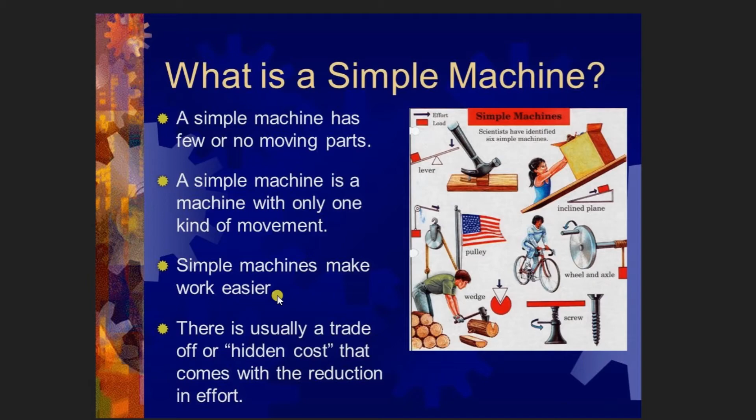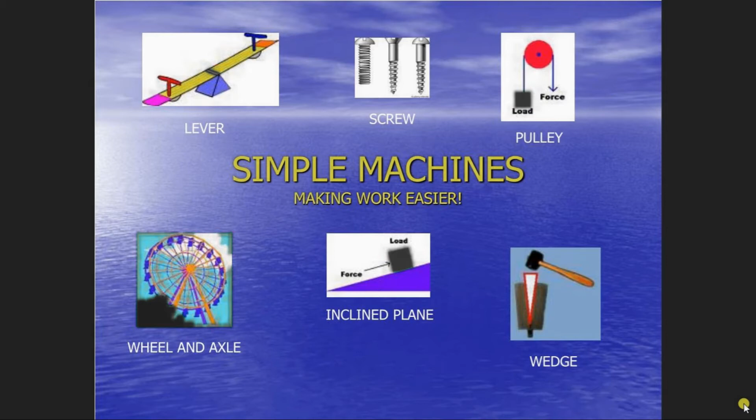Here you can see that there are 6 kinds of simple machines. What are those? Lever, screw, pulley, wedge, inclined plane and wheel and axle. So one by one we are going to study about each machine.

A lever is a bar or a board that rests on a support or is fixed at one point. A lever can transfer and increase the force applied at one end of it, and it is used to move heavy objects and open things like the lid of a box.

So here you can see that 3 things are there: effort, load and fulcrum. So the fixed point at which this rod moves is called the fulcrum, whereas the object which has to be lifted is called the load, and whatever force you are applying on the rod is called the effort. So 3 things are present in a lever, that is the fulcrum, load and effort.

Now talking about the types of lever, based on the positions of fulcrum, load and effort, levers have been classified into 3. What are those? Class 1 lever, class 2 lever and class 3 lever. So one by one we are going to study about each type of lever.

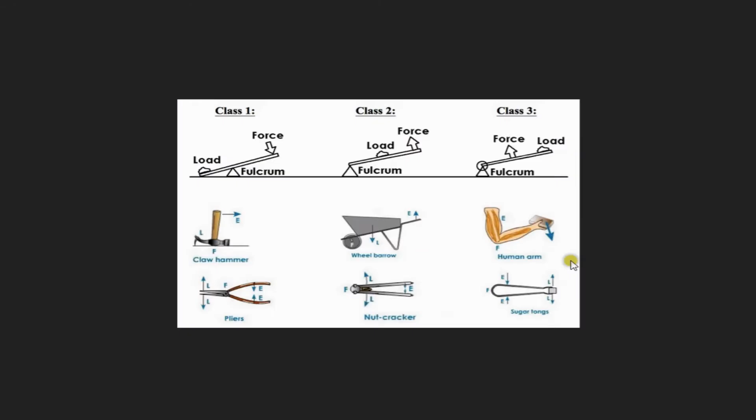Now depending on the middle position, you can see here in a class 1 lever, the fulcrum is in the middle. In a class 2 lever, the load is in the middle, and in a class 3 lever, the force, or you can say effort, is in the middle. So for load, fulcrum and effort, the position will keep on changing accordingly.

So in the first, the fulcrum is in the middle, second, the load is in the middle, and third, effort or force will be in the middle, or you can say this force is also denoted as effort. Okay, that means how much force you are applying or how much effort you are applying to do the job.

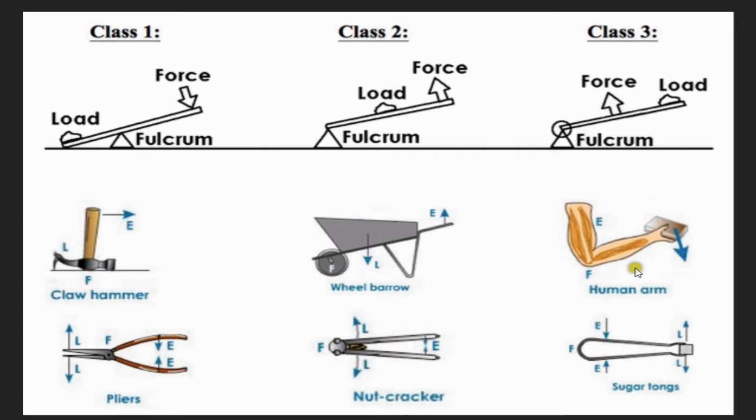For class 1 lever, the examples are the hammer and the pliers. For class 2 lever, examples are the wheelbarrow and nutcracker. For class 3 lever, the human arm and sugar tongs.

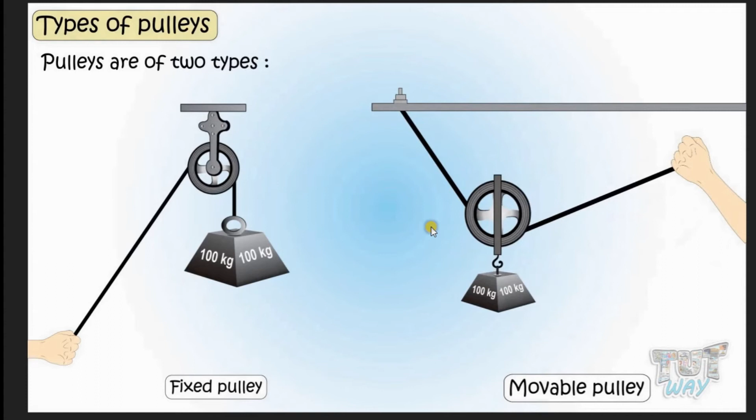Movable pulley. In a movable pulley, the wheel also moves along with the load. Okay, this is not fixed at one place, unlike the fixed pulley. So this is called the movable pulley, and the wheel also moves along with the load. This pulley is used to lift heavy loads, and they are used as a crane or to lift the heavy engines of vehicles.

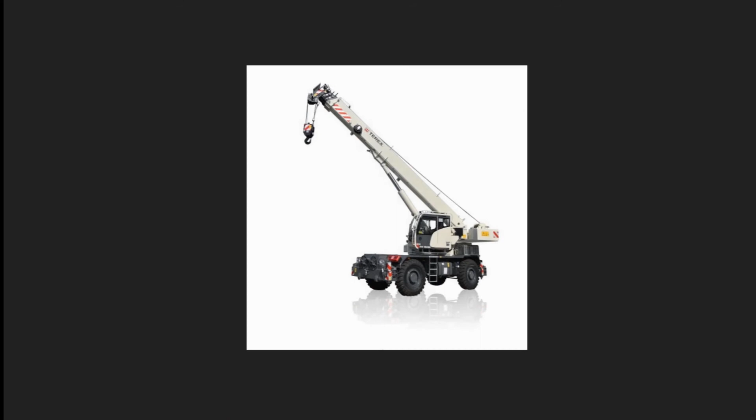A fixed pulley is used to draw water from the well. This is one of the examples. Whereas a movable pulley is being used, you can see here, to lift heavy objects such as heavy engines of vehicles.

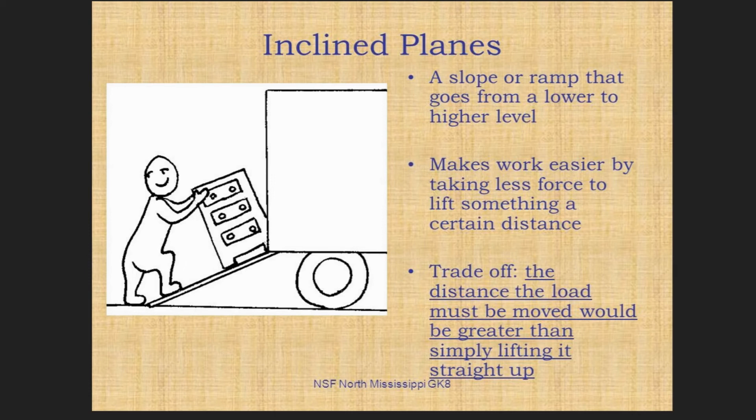Now children, the next simple machine is known as the inclined plane. It is not a complicated one. An inclined plane is just a sloping surface, or you can say a ramp, that goes from a lower to a higher level. That means its one end is higher than the other and it helps to move heavy loads with less effort. That means you need not put in more effort. Okay. There are some examples of inclined planes.

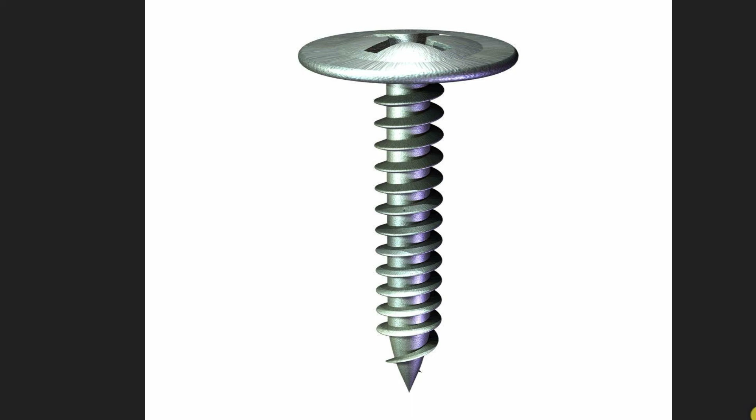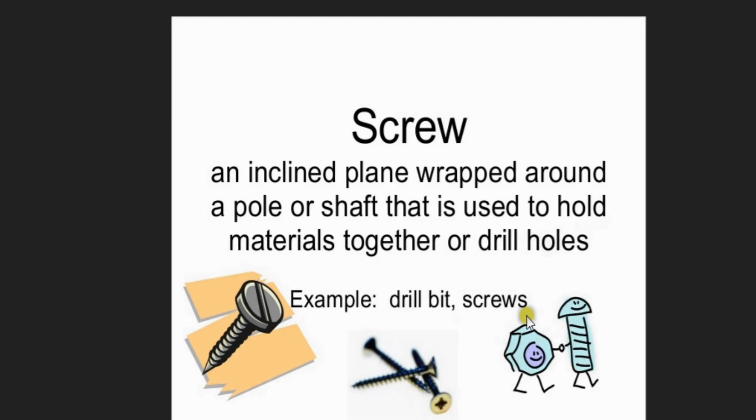Now the next machine is the screw. Actually, a screw is a curved slope or an inclined plane which is wrapped around a pole or a cone or shaft that is used to hold materials together or drill holes. Okay, so these are the examples given here. A drill bit is there, then screws are there, and a bottle cap also works on the screw, and a dentist chair is also there, and then screw jacks.

The next simple machine is the wedge. A wedge is a simple machine used to push two objects apart. That means it is used for splitting or cutting the object. A wedge is made up of two inclined planes. Okay, these planes meet and form a sharp edge. This edge can split things apart.

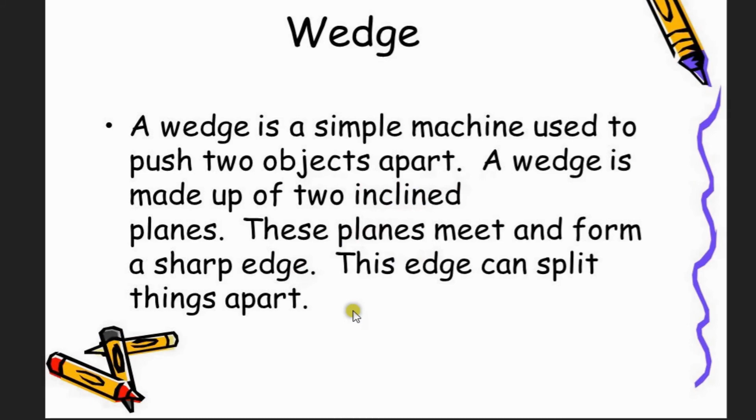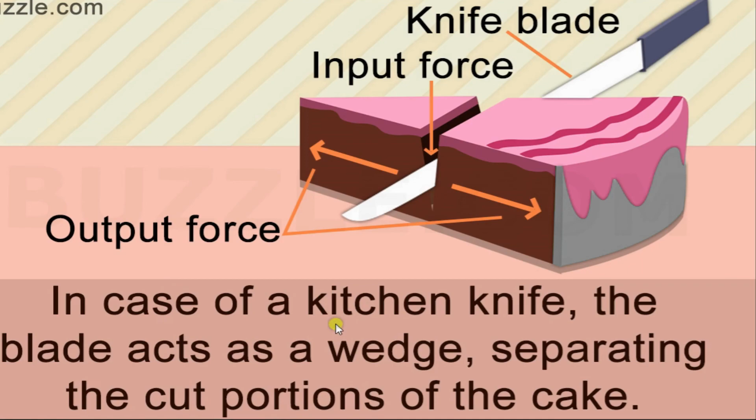Now the sixth machine is the wheel and axle. Here you can see that it is two connected objects that rotate about a common axis. So here this is the axis on which the wheel will move, and on the same axis a rod will move. So this combination is called the wheel and axle.

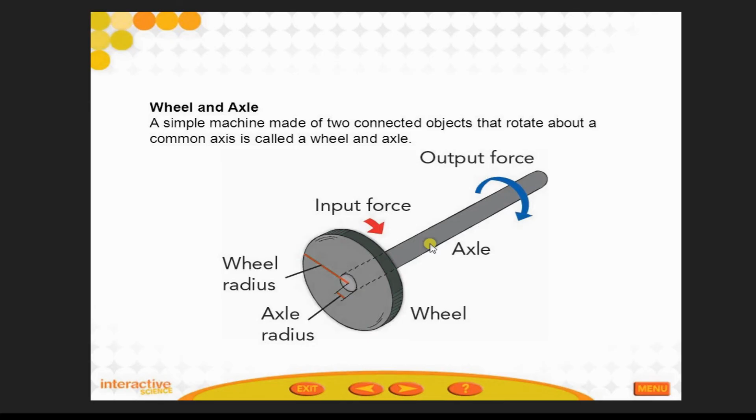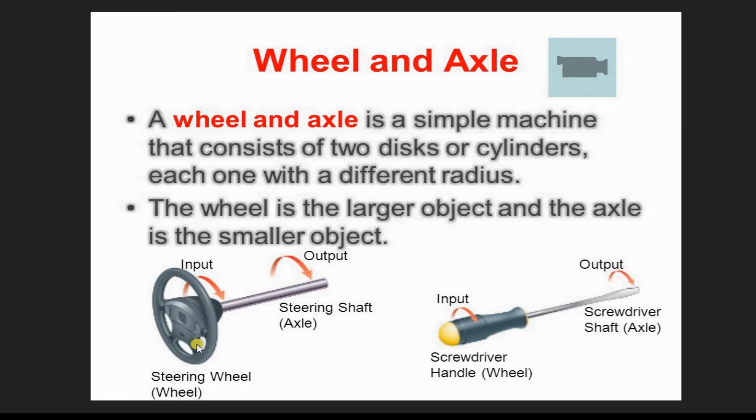You can see the examples: steering wheels, which are present in vehicles. So here the steering shaft is the axle, and the steering wheel is the wheel, and in the same way the screwdriver is here. Some more examples of wheel and axle are given here.